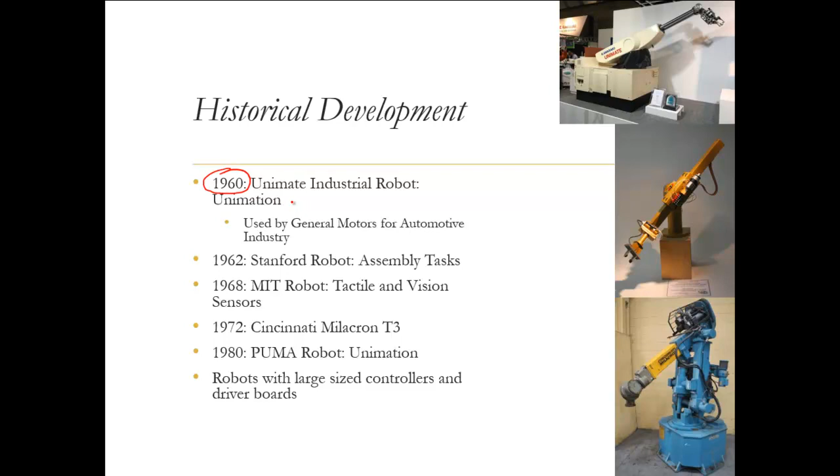So the historical development of these robots, it all started in the 1960s. Unimate was the first industrial robot, developed by Unimation. It was used by General Motors for their automotive industry. This was the first robot ever used as a mechanical manipulator, and the interest grew

with Stanford developing their Stanford robot for assembly tasks. So this is the Stanford robot. This is Unimation's Unimate industrial robot. This is something called a spherical manipulator or spherical architecture robot. And then MIT also developed a robot with tactile and vision sensors.

There was the development of the Puma robot by Unimation again. It is one of the most celebrated, or you can say one of the most popular robots that has been developed. And then obviously the most important thing was the robots had large size controllers and driver boards, up to, I would say, the 90s.

So your microcontrollers and your processors were actually large sized. So the overall robot itself, in terms of construction or the space it would take, a lot of space was required. But as the technology grew from the 1990s to the 21st century, your microcontrollers and microprocessors are now smaller and more efficient than the ones that were available then. So robots have become more compact now, as any other mechatronic device.

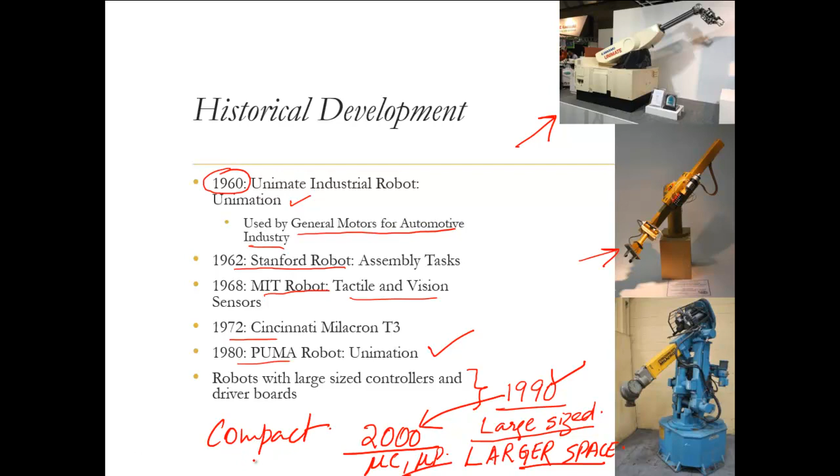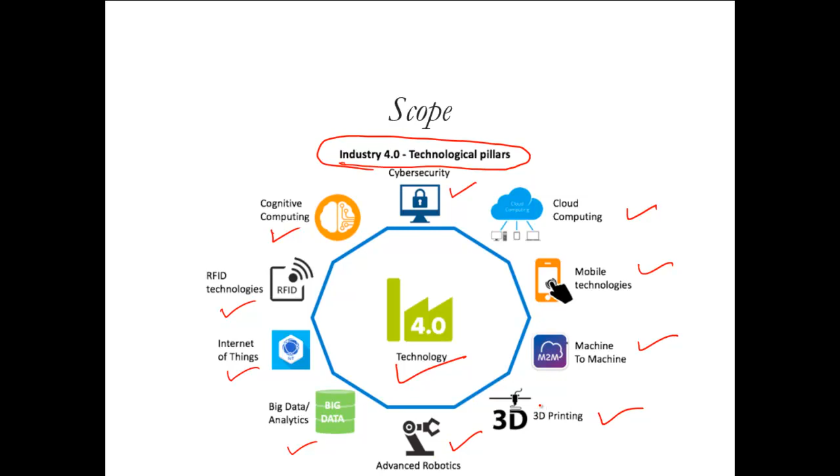Now this is what I was referring to as factories of the future, which is envisaged with robots, or what we call cobots. Cobots means collaborative robotics, where robots interact and collaborate to do a particular task. And there are unmanned trucks that can be used as modular equipment, robots with computer vision, and IoT sensors for supply chain management.

There is industrial augmented reality. There is something called predictive machine analytics. There is blockchain, again a popular technology for ERP and supply chain management. All these things together shape up the factories of the future that are envisaged. But robots also play a key role in all these things.

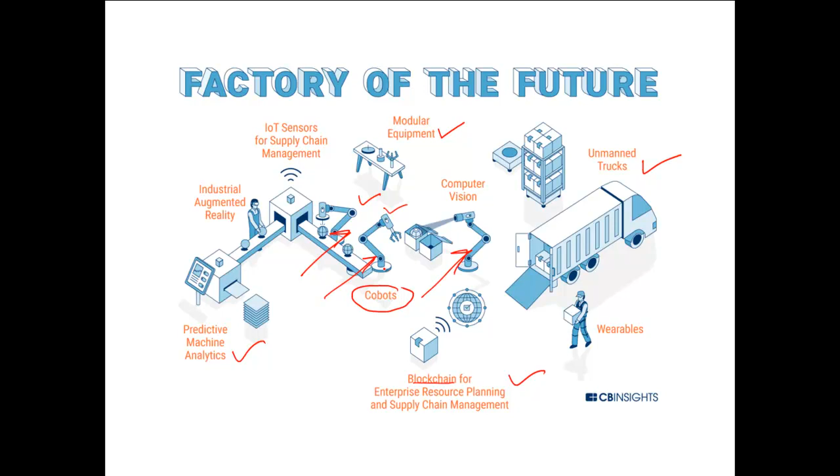So designing precise robots, accurate robots, highly controllable robots, flexible robots, robots that can interact with humans, or robots which can interact with each other. All these things remain, I would say, a contemporary topic these days.

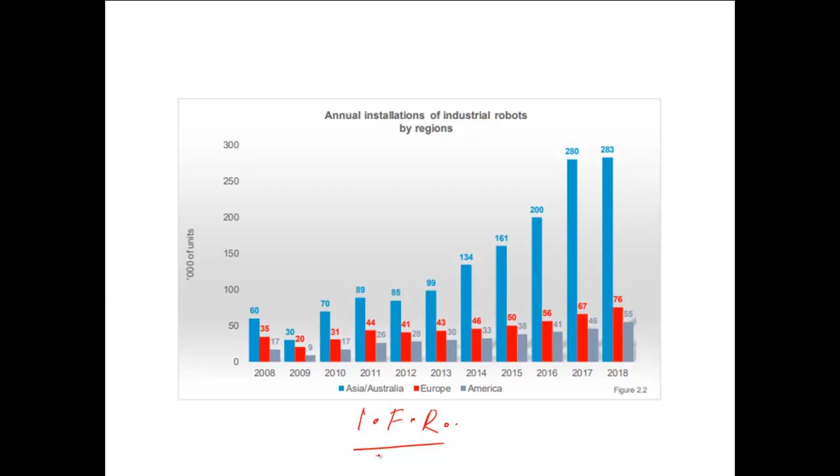Now this is the overview of the annual installation of industrial robots by region. This is the latest data that I have got from the International Federation of Robotics. There's a website for the International Federation of Robotics; you can just go through it. It is on the internet, and they have published a report on this.

So if you see this, in 2018, particularly in Asia and Australia, this blue corresponds to that. The annual installation of industrial robots is increasing year by year. So there's a growing trend in the installation of industrial robots in industries and at many places.

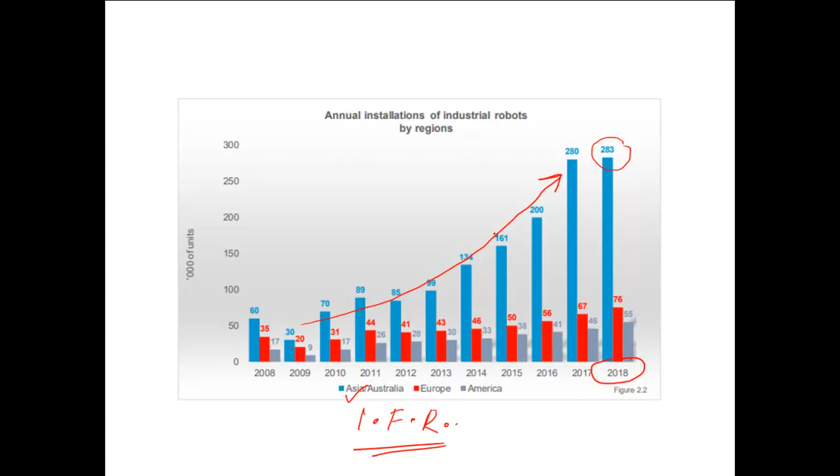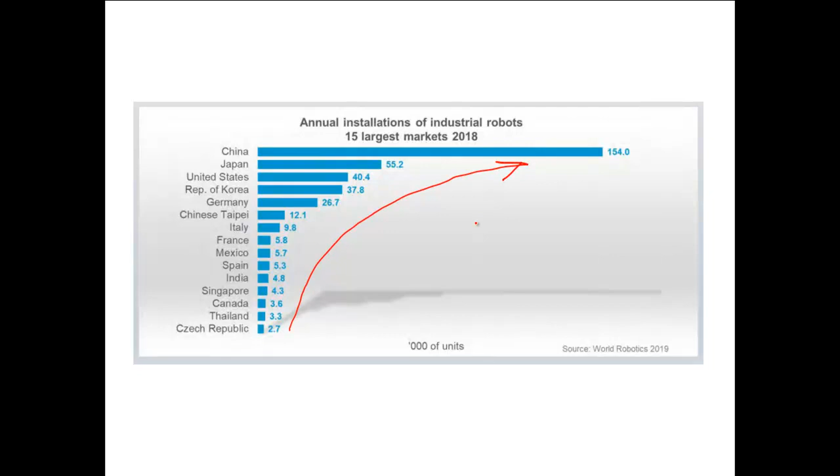Now the installations per country, just to give you a picture of the developments in the developed countries: China is actually leading in this. This is from the World Robotics 2019 source, again from the International Federation of Robotics. So China is leading. China is trying to create the market for the future.

So obviously in industries you have something called rigid automation, programmable automation, and flexible automation. Rigid automation is where the tasks are specified and the machine is dedicated to the task. For example, producing a die or some other component where the machine has been dedicated for that. So you can mass produce with this. You can produce thousands of units per day with this type of automation, because you know that this component is required in huge number, and don't worry about the change in the requirement of these components.

So rigid automation is very useful in that case, where you are focused on a particular item only and you understand the demand. Programmable automation is where you can always program the machine to do various other tasks also. Programmable automation is where you want to change these automation components like machines or robots to do a particular task and change for requirements accordingly.

But flexible automation is something where you can change your whole setup based on the demand in the market. So the market says no, we don't want this component, or the market demand for the component decreases, then you go for a change in the whole setup. But it becomes very difficult for an industry to change the complete setup unless the industry has opted for flexible automation. So flexible automation allows you to change with the demand. Your machines or systems are developed in such a way that they can adapt to such things.

Industrial robots in particular, it's a title rather than just robots. Why industrial robots? Industrial robots are the largest class of robots existing at present. They are mostly fixed robots which do repetitive and often precise mechanical and physical tasks. The word fixed is important here. They are fixed at some place. There could be mobile robots also, which we will see in the classifications and their applications.

So these robots pervade many of the areas of modern industrial automation, as we have seen previously, and are mainly concerned with tasks performed in a structured environment. These robots can perform in unstructured environments also, but the largest class of robots that exist today are performing things in a structured environment. It's a dedicated, known environment which has been structured properly for a particular task. So the largest class of robots, industrial robots, perform mostly in the structured environment.

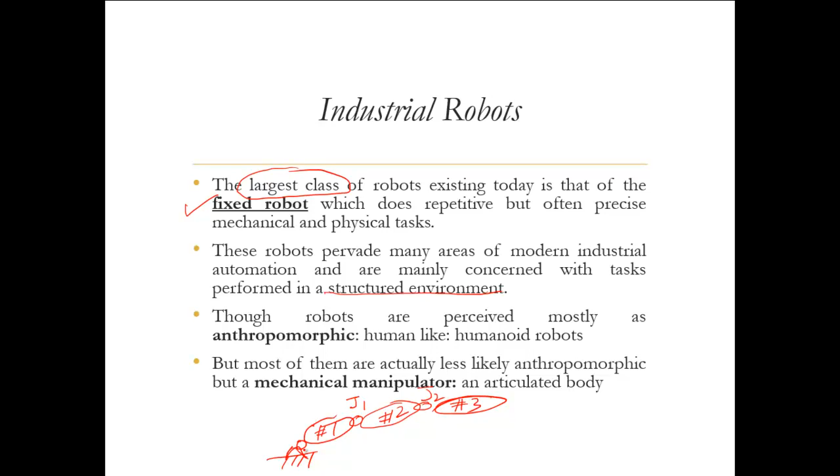together by joints. So this may be similar to a human arm, which again has joints like joint number one, joint number two, joint number three, links here, and other links in terms of fingers here. So kind of imitating that behavior. Some of them are human arm shaped or something like that, but they may not necessarily be humanoid.

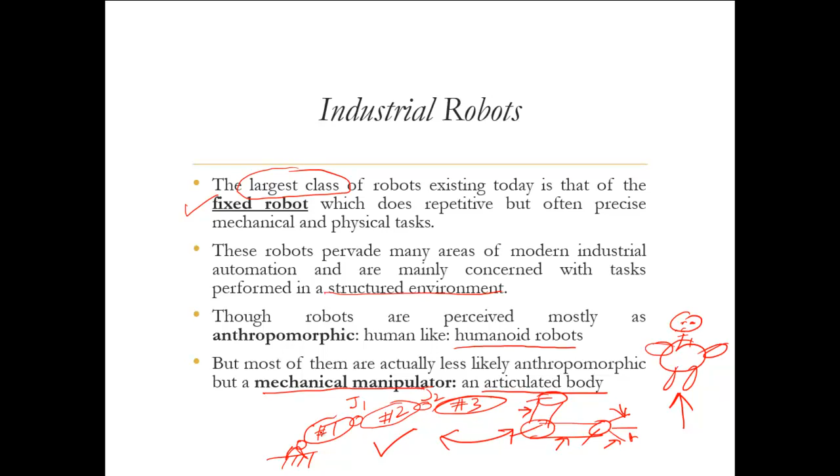Humanoid would mean very similar to the whole human body, where you have limbs, arms and legs, and maybe a head which consists of sensors and other things. It's not necessary to have a robot like this. Robots are mostly in this way, which is more of a mechanical manipulator, or we can say an articulated body. Articulated body means bodies connected with joints. All right.

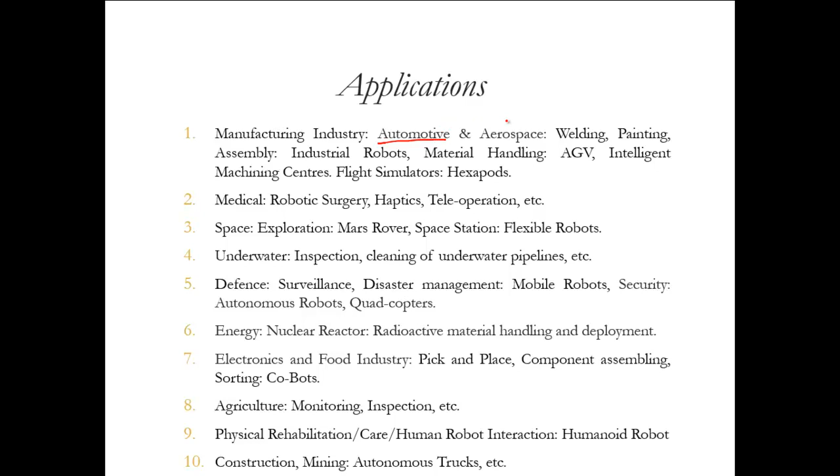Now coming to the applications of robots, or robotics in general. The most important sector that robotics caters to, or the first sector that robotics took shape in, was the automotive sector, the development of automobiles, where General Motors has been the front runner in using the Unimation robot. But obviously in aerospace also, where mostly the jobs done by robots are welding, painting, and assembly tasks, where we have industrial robots.

Now we have material handling, also one of the important aspects in any industry, where we have automated guided vehicles. They are also classified sometimes as robots. And you have intelligent machining centers, like a CNC or other things. They are also sometimes roughly classified as robots.

You have flight simulators, where you have hexapods that help you simulate a flight, or you can call them vehicle or flight simulators. Hexapods are again a variant of robot. We'll come to that later on. Robotics has a profound application in the medical arena, which is robotic surgery, very contemporary these days. Haptics, which is related to the sense of touch, and teleoperation, where you operate a robot from a different place. We'll come to these things again in the next slide.

You have space, like the Mars rover that is used in space exploration. You have flexible robots that are used in space stations. Flexible here means not flexible in terms of their application, but flexible in terms of the links, which makes them lighter, which is sometimes very necessary in space. You have underwater robots, which are used for inspection and cleaning of underwater pipelines, which are sometimes difficult to be done by humans.

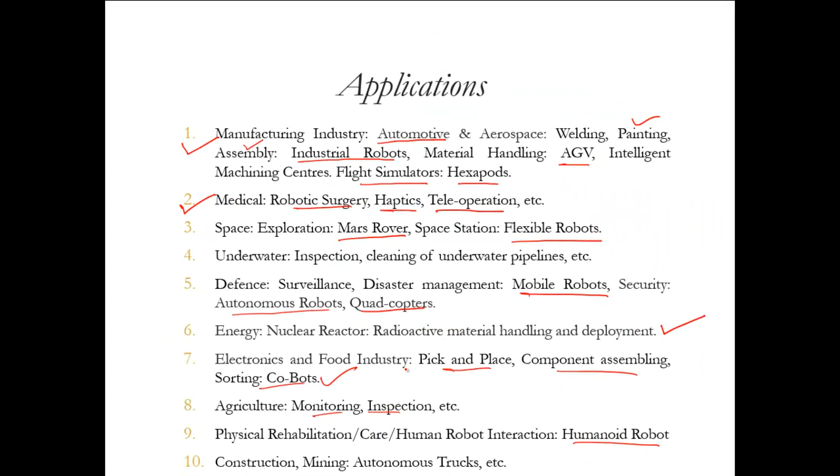And then in physical rehabilitation, human care, or human robot interaction, where humanoid robots are popularly being developed. And then in construction and mining, where you have autonomous trucks and others. So apart from all these applications that I have listed, you have so many other applications of robots in general.